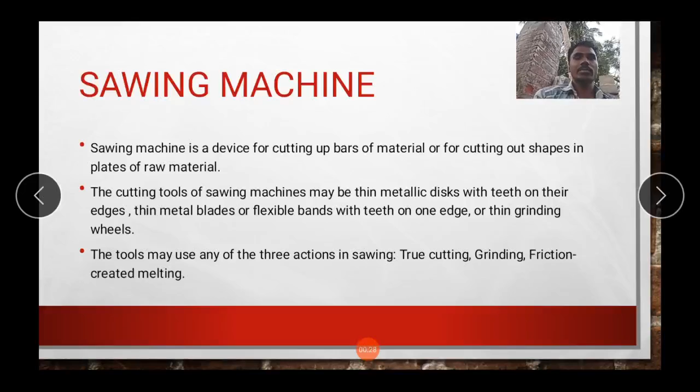Working principle. How to cut the metal using this machine? First, on the raw material, draw the shape. This shape is cut using the sawing machine. A drive wheel and idler wheel support and drive the blade. Why use the idler wheel support? Because the idler wheel is used to change the direction. For this purpose the idler wheel support is used.

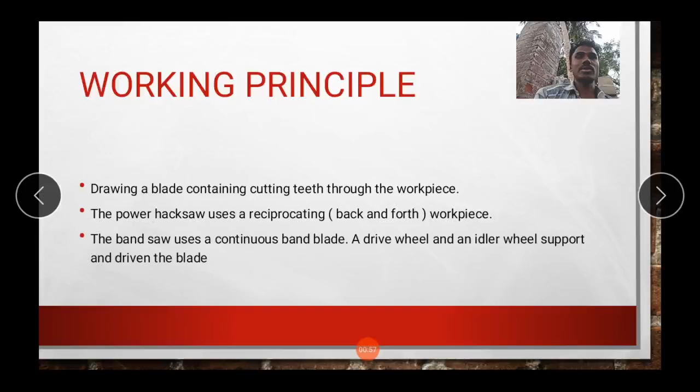Types of sawing machine. Three types of sawing machines are there. One is reciprocating saw, another one is band saw, third circular saw. Reciprocating saw also has two types: horizontal sawing machine and vertical sawing machine. Band saw also has two types: contour band saw and friction blade. Circular saw has three types: cold saw, friction disc, abrasive disc.

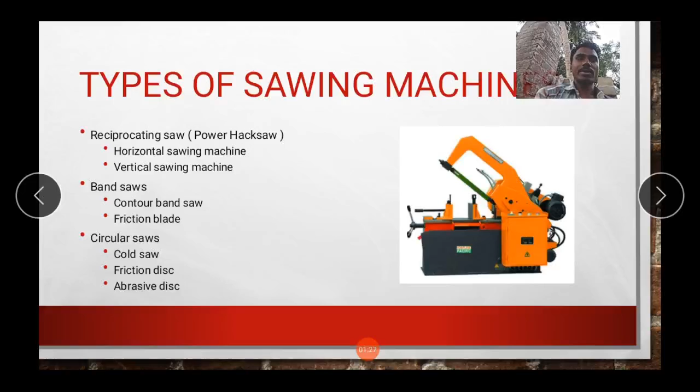What is a reciprocating saw? The reciprocating saw is commonly used for remodeling and demolition purposes. It is known as a power hacksaw. It consists of a saw frame, means of reciprocating the saw and frame, work table and vise, supporting base, and source of power.

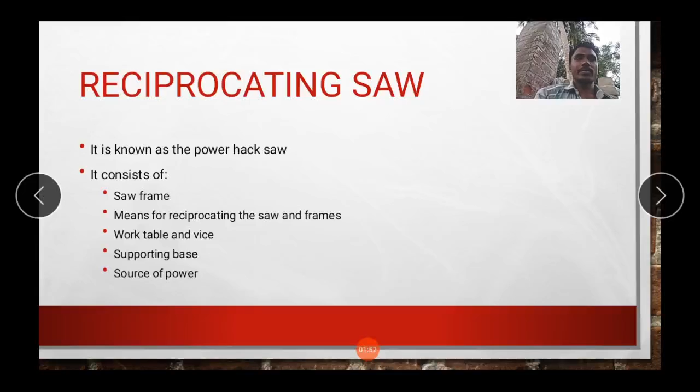All the saws use electric power, but in the reciprocating saw most of the operations are hydraulically controlled. Two types of cuts are made using the reciprocating saw: one is square, another one is angular.

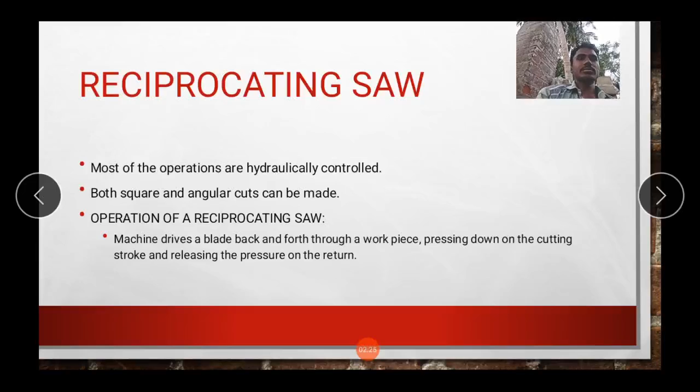Operations of reciprocating saw. The machine drives a blade back and forth through a workpiece, pressing down on the cutting stroke and releasing the pressure on the return. Two types of reciprocating saw are there: horizontal reciprocating saw and vertical reciprocating saw. In this video we are going to see how to cut the metal using a reciprocating saw.

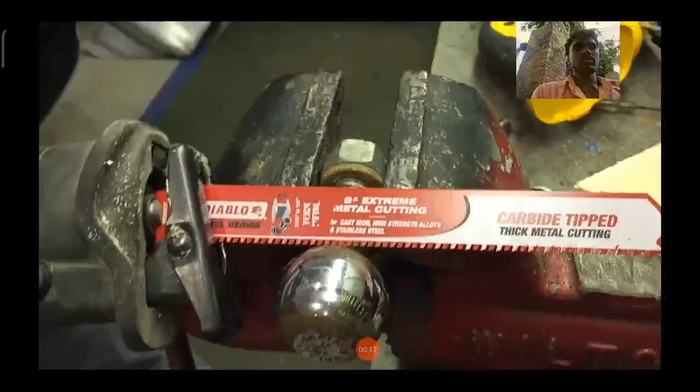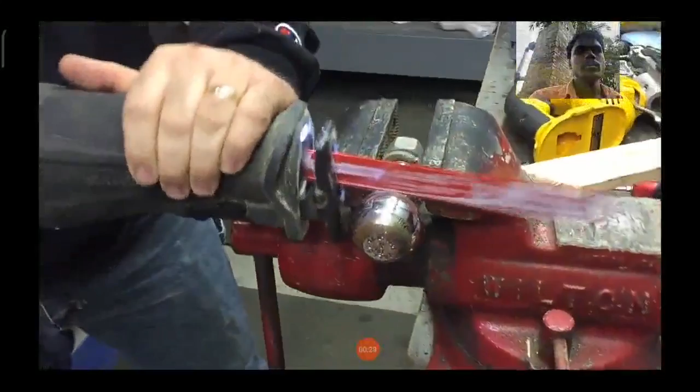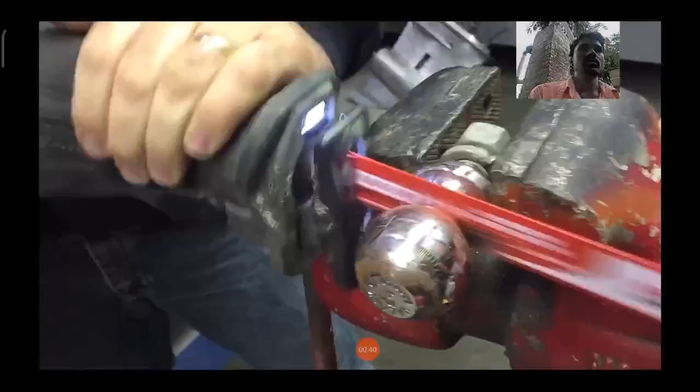We're going to cut through this trailer hitch ball. They don't think it can do it. There's no way it's going to. All right, well, go for it. No way? Wow, impressive. Do you guys really think it's impressive? Incredible. Yes, it is. And look, how's the teeth look? Still got tons of life left. Yeah, like you never even used it. That's it, man. Extreme metal cutting from Diablo.

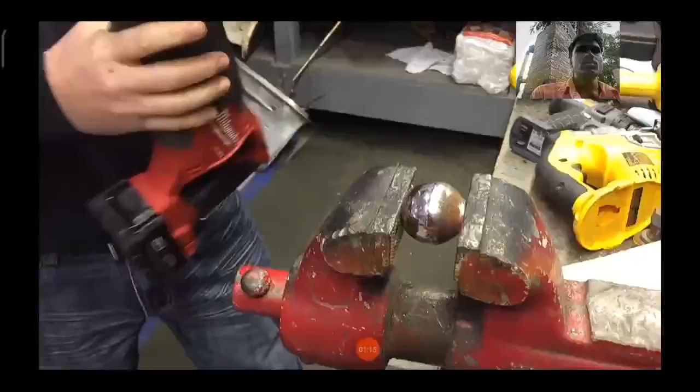It's the bomb. Wow. Now we got Joel from Brewski's Motorsports. He looks like Ryan, but it's not. Ryan's over there. They're twins. So, Joel, we got the new metal extreme cutting blade from Diablo. It's going to cut through that ball. Do you think it's going to cut through it? I don't know. We're going to find out here in a second, so let's give it a shot. Very good. I don't know how it's going to cut.

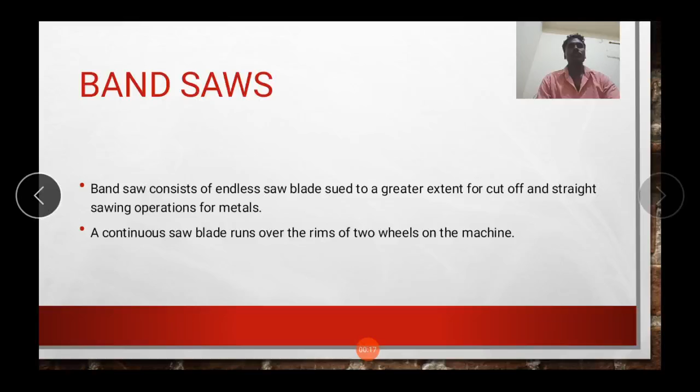The second type is band saw. A band saw is a power saw with a long, sharp blade consisting of a continuous band of toothed metal stretched between two or more wheels to cut the material. A continuous saw blade runs over the rims of two wheels on the machine. Band saw has two types: one is contour band saw, another one is friction band saw.

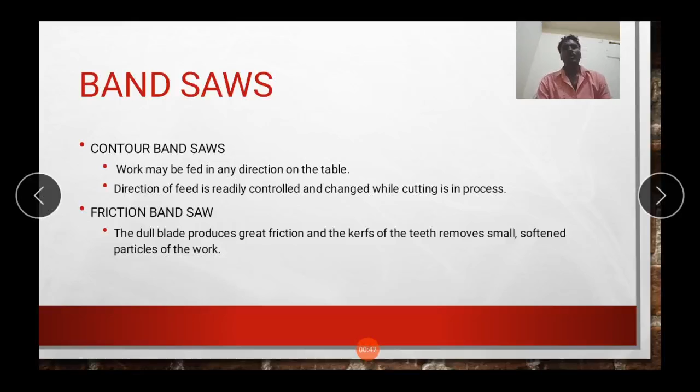Contour band saw is also known as vertical band saw. The work may be fed in any direction on the table. Direction of feed is readily controlled and changed while cutting is in process. Second one is friction band saw. Friction band saw uses a dull blade. Using the dull blade produces great friction. This friction is used to cut the metal. This is friction band saw.

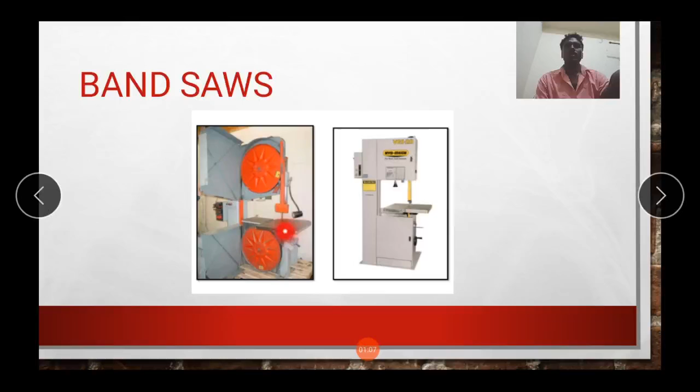Two types of band saw pictures are there. This is friction band saw. This is vertical band saw. In the friction band saw, the continuous tooth is rotating. The workpiece is moving. This way friction is created. Using this friction, cut the metal.

Circular saw. What is a circular saw? A circular saw is a rotary motion. Two shapes are cut using the circular saw: one is angular, another one is cross section. A circular saw disc may have large teeth or no teeth. Circular saw also has three types.

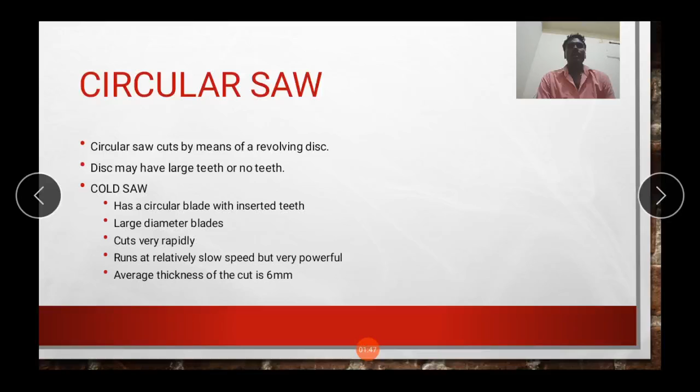One is cold saw. This is a circular blade with inserted teeth. Cold saw uses large diameter blades, cuts very rapidly, runs at a relatively slow speed but is very powerful. Average thickness of a cut is 6 mm.

Second one is friction disc. Friction circular blades have almost no teeth, rotating at high speed. Due to this reason, they generate more heat. This heat is used to cut the metal. It leaves a heavier burr and a less accurate surface. Third one is abrasive disc. Rubber bonded wheels rotating at high speeds are used. Cutting action is fast and accurate.

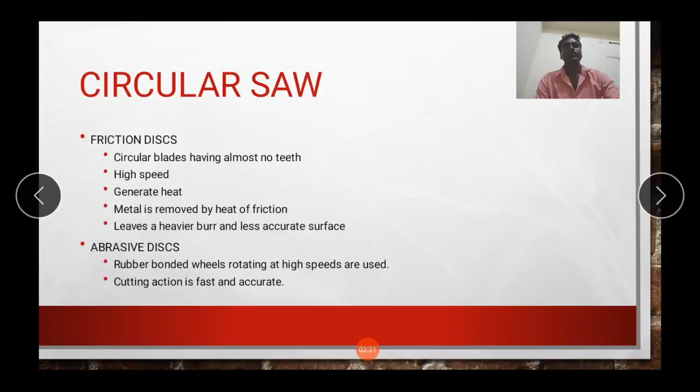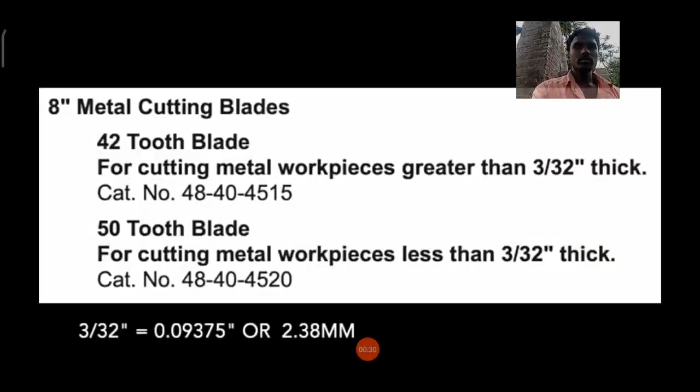Before starting work, you want to make sure that the blade is in good condition. Check all the carbide teeth, make sure they're not dull or chipped. Use the appropriate blade for the material you're cutting. Anything over 10 gauge will require a 42 tooth blade. Thinner material, a 50 tooth blade. Today I'm cutting 5/16 thickness A36 mild plate steel.

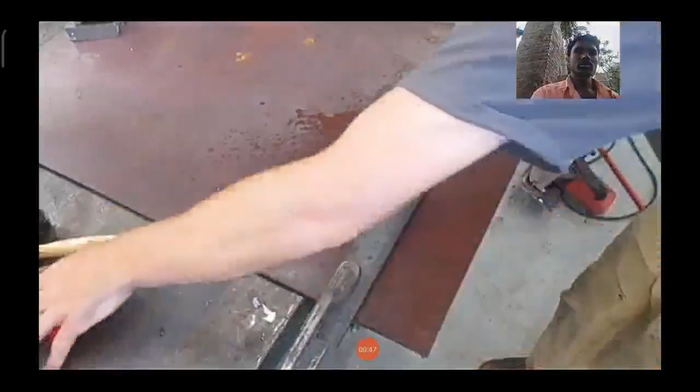Here I'm setting up the guide at the appropriate offset. In this case, I want to cut some strips 1 and 7/8 inch wide, and I know that the foot or the base of the saw has a 2.5 inch offset. So I'm going to simply set it at 4 3/8 inches, and that will create a straight line guide that the saw can follow.

After tightening your clamps, make sure you go back and you double check your measurements. It's not uncommon for the straight edge to shift a little bit as the clamps get tightened. You may have to go back a couple of times to get it dialed in just perfect. The more accurate you are here, the more accurate your finished result will be once you start cutting.

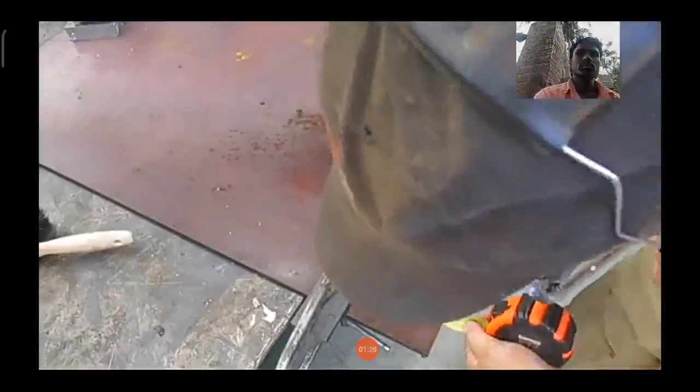It's always a good idea to start your cut and just make a very slight cut into the material so that you can measure and make sure that you're cutting the correct width before you make your cut. Let the saw come up to full speed and then enter the work carefully. You want to find a pace that is allowing the saw to cut at an even rate and that sounds good. If you press the saw too hard, you'll hear the motor drag down.

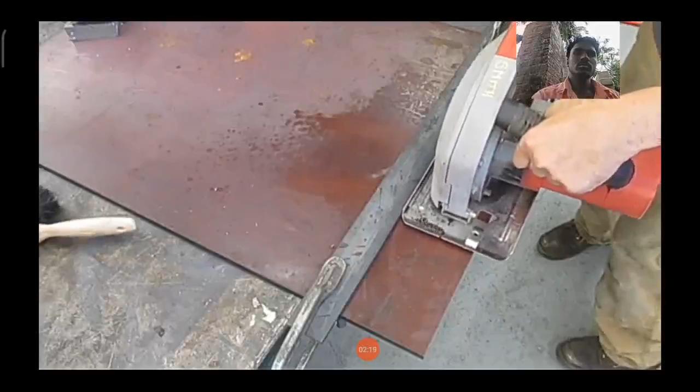You want to go a little bit slower, but you don't want to go so slow that the blade builds up excessive heat. It can cause it to wear out prematurely. You need that chip to help carry away the heat. I find on this thickness of material, a pace of about 1 to 2 seconds per inch feels about right. At the end of your cut, you want to make sure that you have a way to catch the material, either by hand or have a helper who can catch it.

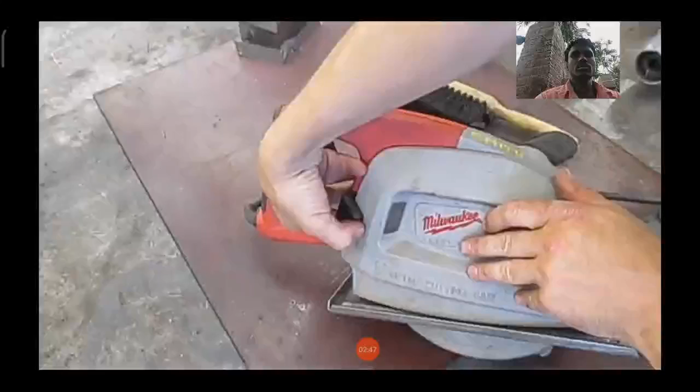After making the cut, remove the chip bin from the saw and dispose of the chips in the trash can. You want to take the time to empty the chips after each cut. Metal cutting saws have a relatively low duty cycle, meaning that they can typically cut maybe for a minute or two, and then they need to stop and cool off for a while. The manual contains a chart indicating the amount of time and the number of inches you can cut at various thicknesses. The saw does have a thermal protection circuit on it, but it's recommended that you try to stay within those recommendations not to overheat the saw.

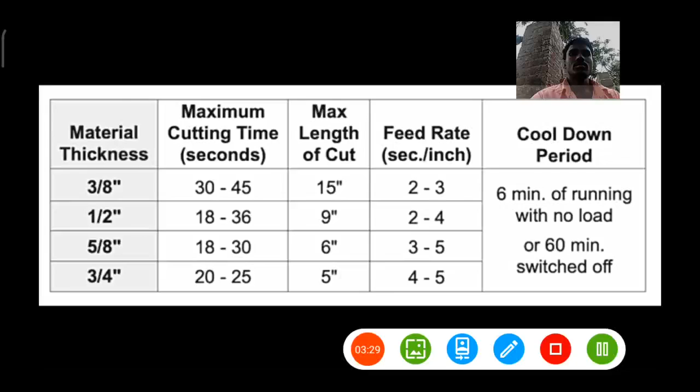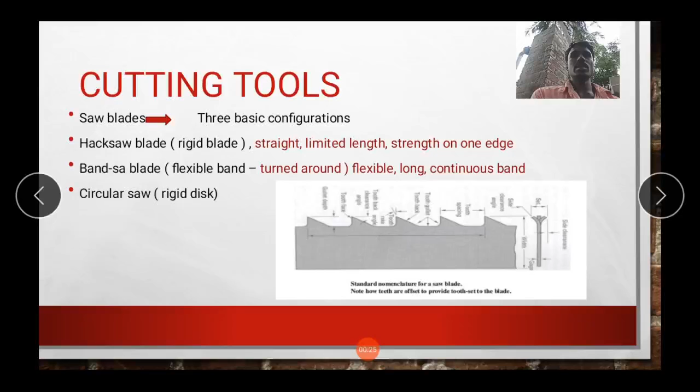Cutting tools, saw blades: three basic configurations are there. One is hacksaw blade, second one is bandsaw blade, third one is circular saw. Hacksaw blade is a rigid blade. This is limited length, using strength, more strength on one edge. Bandsaw blade is a flexible band. This is also a long continuous band. Circular saw, this is a rigid disc. See the blade and the tooth picture.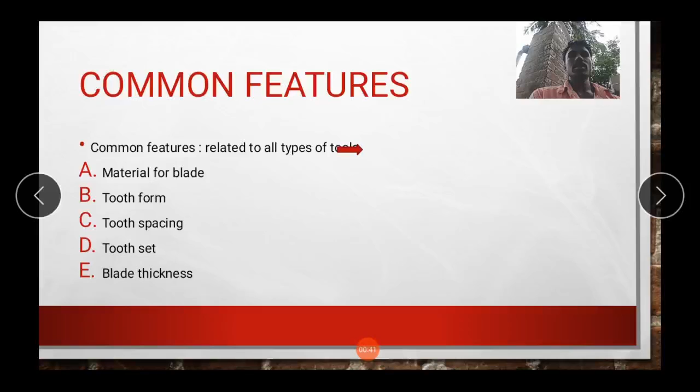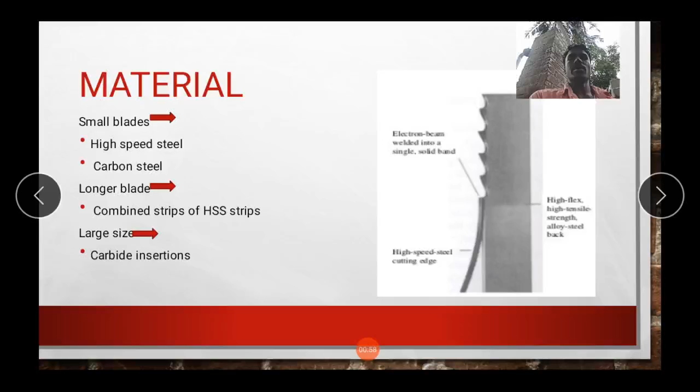Common features related to all types of tool: material for blade, tooth form, tooth spacing, tooth set. Last one is blade thickness. Material: small blades are made of high speed steel or carbon steel. Longer blades are made of combined strips of high speed steel. Large size is made of carbide inserts. See the picture: high speed steel cutting on one edge. This is high speed steel being used.

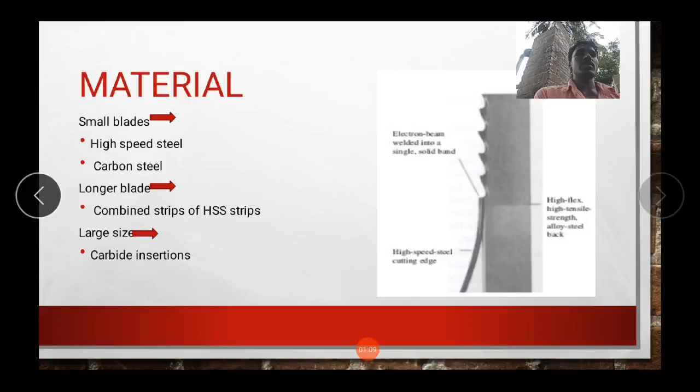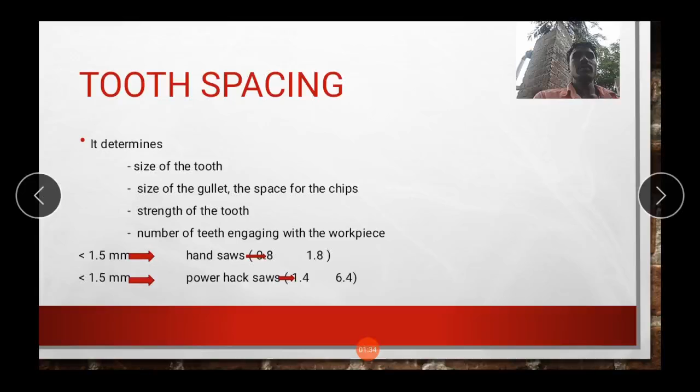Tooth form: three types of tooth form. One is straight tooth, undercut tooth, third one is skip tooth. Skip tooth is used mostly for rough cutting. Tooth spacing: tooth spacing determines four parameters. One is size of the tooth, second one is size of the gullet, the space for the chips, third strength of the tooth, four number of teeth engaging with the workpiece. Different types of teeth and blades are there. Different purposes, different blades and teeth are used.

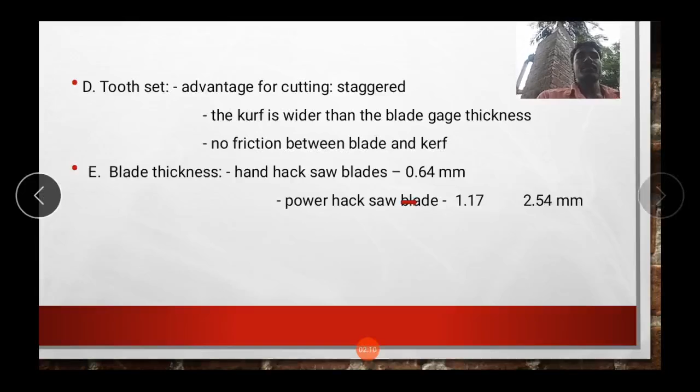Tooth set. Advantage for cutting: staggered. No friction between blade and kerf. Kerf is wider than the blade gauge thickness. Blade thickness. Hand hacksaw blade is 0.64 mm thick. Power hacksaw blade is 1.17 to 2.54 mm. As a general rule, a blade twice longer than the workpiece is very important. Saw blades for long band saws, sold in reels, use a combination of tooth pitch to reduce noise. Narrow blades change direction more easily.